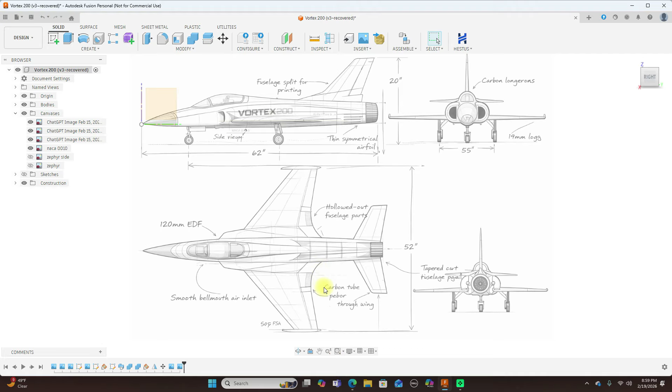And you can see it says the wingspan would be 52 inches. So 52 inches and this is 55. Unless this is half of this, I really haven't looked at it that much. But it talks about how to go about building this. And they called it the Vortex 200. I believe the 200 is just for the 200 miles per hour.

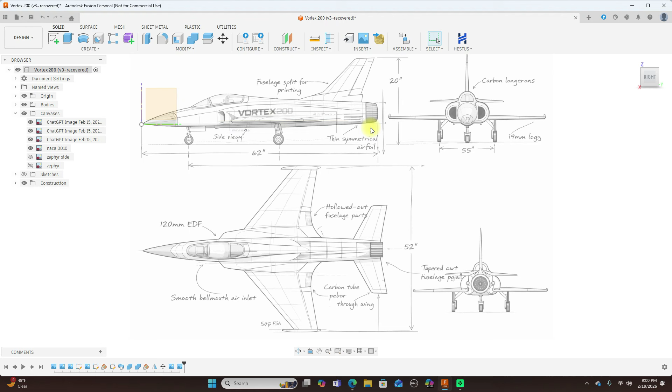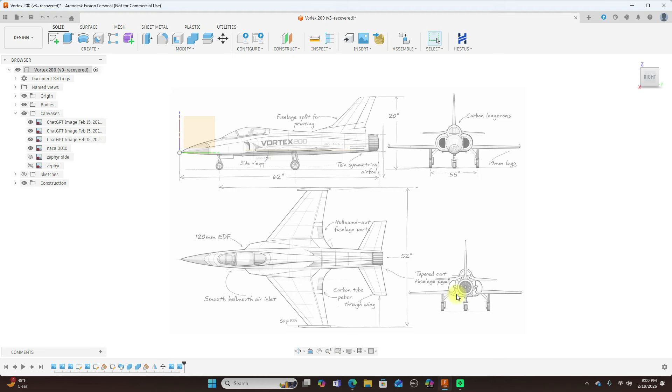So I wanted to see how accurate these drawings were. I could model this jet pretty simply, but it took a lot of liberties. If you look at it back here, and then you look at the top here, you wonder how the intakes actually flow in here. How do these intakes flow in? Do they come in under the wings or something? We just don't know, but I would have to take some liberties designing this, but this would not be very difficult to design.

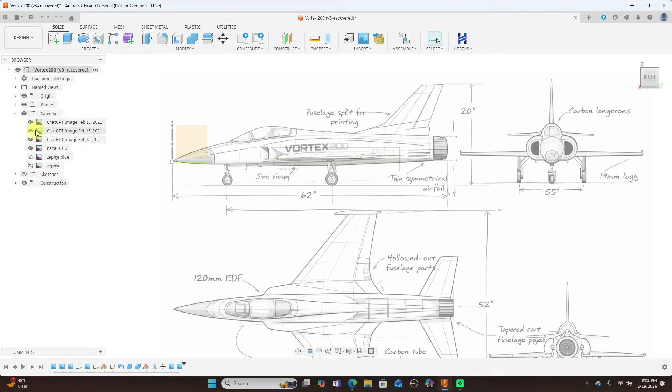And then I wanted to see how accurate the wing was. It suggests that I use a NACA 0010 airfoil, and so I put that airfoil in here. Let's turn off the side view here. And you can see I put the airfoil in here. Then I actually started modeling just the wing to see how accurate it was.

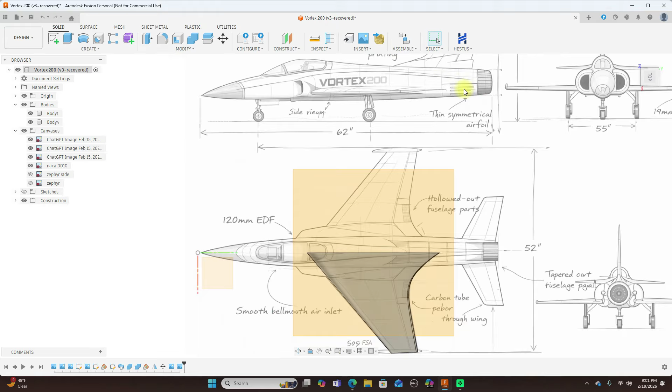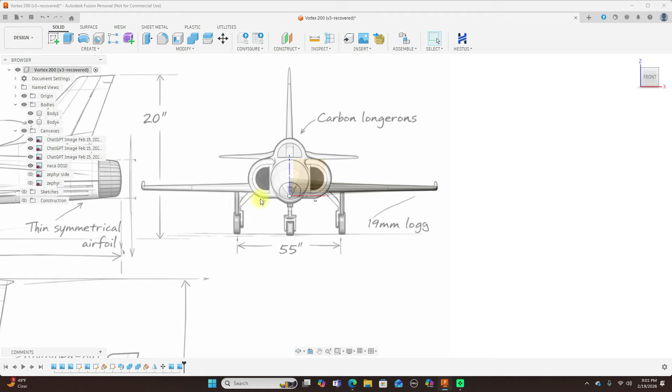Okay. And then looking at it, it's two pieces, forgot about that. As you can see, this wing here is a little thick, and that's not a problem. I could thin this out. But then again, these drawings are not very accurate, so it's not a really big problem.

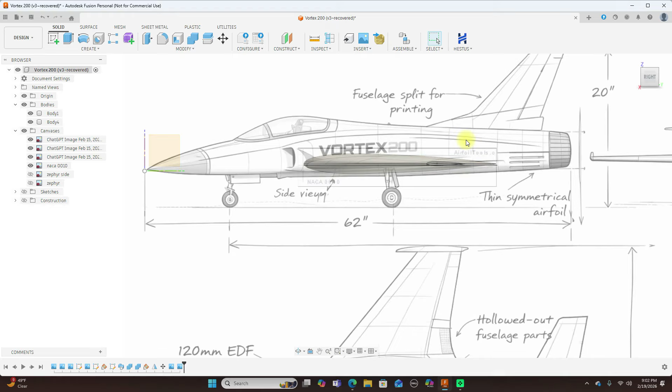But I thought, there are a lot of sport jets like this out there on the market, and I didn't really want to design something like this. I felt there are better designs out there capable of 200 mile per hour speed. So then I remembered the Zephyr Industries XF-109, a small 50 millimeter EDF speed jet. I thought of scaling that up, possibly putting in a 100 or 120 millimeter EDF fan.

So I went back to AI and asked, can the Zephyr Industries XF-109 actually handle 200 miles per hour, not just hit it, survive it? Then I started evaluating whether the XF-109 platform can realistically be pushed to that level with a 120 millimeter EDF fan. And this isn't hype, this is engineering. So let's get into the Zephyr.

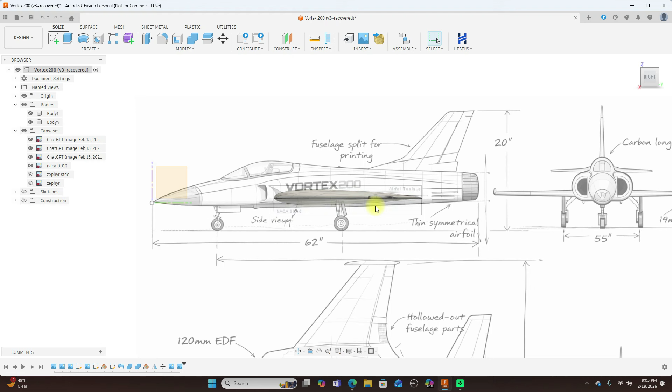Okay, here's the side view of it. And it's a sleek looking jet. That intake here. So this realistically should give me something easier to get to 200 miles per hour over the jet that AI designed, the sport jet looking jet. But I think this will be easier to try to get to that 200 mile per hour.

And the wing requirements, like I was saying, it's very important. Because the faster you go, drag increases with the square of velocity. This means that the jump from 150 miles per hour to 200 miles per hour isn't linear, it's exponential. A thick wing that works fine at 120 miles per hour becomes a drag wall at 200 miles per hour. So you've got to really be looking at all this type of stuff.

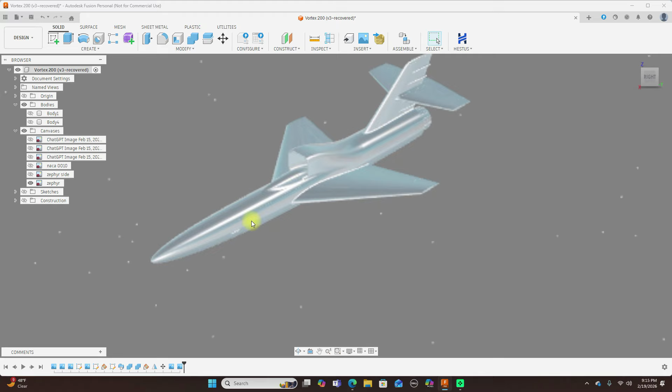And again, 200 miles per hour isn't about power. It's about the engineering. So, like I said, this model here, AI says 170 to 175. I think I can get it to 200 on the 120, possibly a 100, depending on the weight and the size of it, because this looks very, very fast. So yeah.